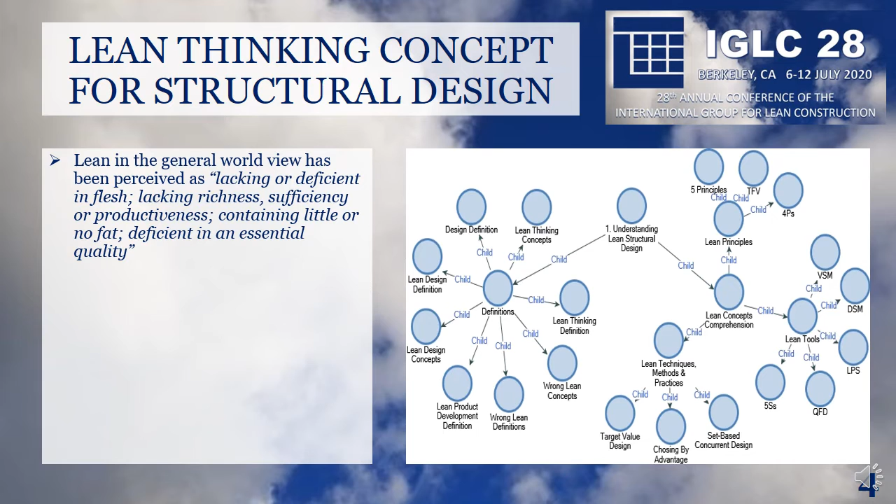Lean production was also defined by Shah and Ward in 2007 as an integrated socio-technical system aimed at reduction of waste through concurrently minimizing supplier, customer and internal variability. Hopp and Spearman in 2004 further addressed lean production as generation of goods or services where buffering costs due to excess lead times, inventories or capacity are minimized. The concept of value generation and waste reduction appear to be the spine connecting these diverse definitions of lean when applied to the manufacturing and construction industries.

The effect of lean concept has motivated many organizations to adopt it. In the attempt of organizations implementing lean concept, Chase in 2001 observed partial adoption of these lean principles without embracing the underlying philosophy and culture initiated by Toyota. Furthermore, the implementation of tools and techniques has been the major focus of most Western companies as compared to the Japanese approach to lean through philosophy and culture.

An overview of research works on lean applied to design demonstrated lean to be a multidimensional concept characterized by different levels and therefore defies a universal definition. However, several researchers have identified lean concepts to be mainly founded on the philosophy and culture with a set of principles, practices, processes, techniques, and tools for customer value creation and waste reduction.

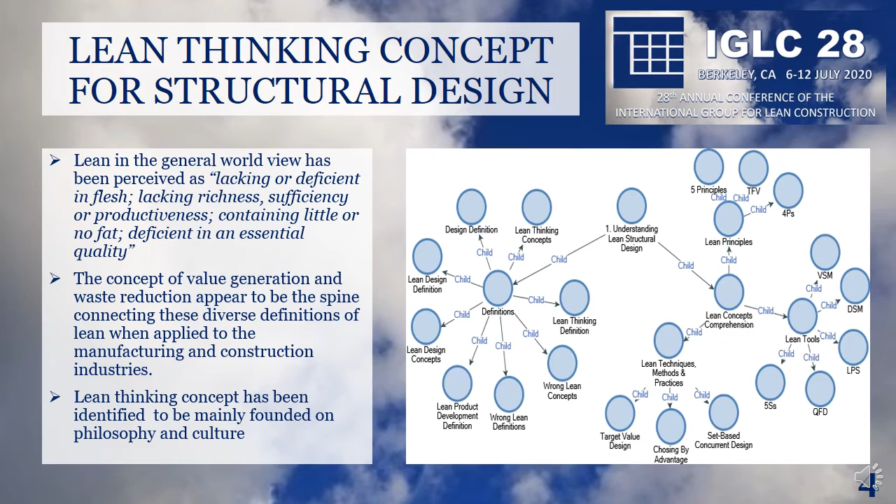Definition of lean structural design. In the construction industry, lean applied to product development achieves the design management field of work, and that's called lean design when applied to building projects. Lean design is an extension of lean thinking in the design phase, which creates the potential for high value in the whole process with well-defined systems, structures, and materials to meet customer needs.

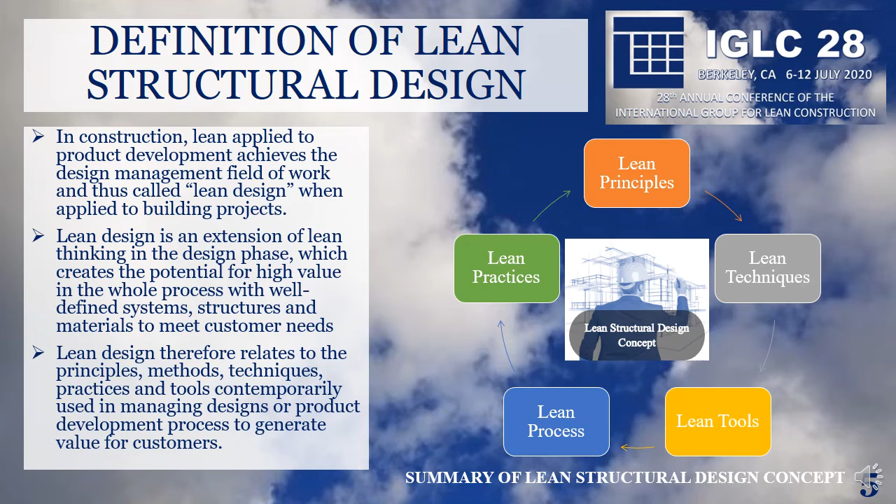Lean design therefore relates to the principles, methods, techniques, practices, and tools contemporarily used in managing designs or product development process to generate value for customers. Subsequently, the application of lean thinking concept in structural design can be achieved through lean principles, techniques, processes, practices, and tools to deliver value for the customer.

Lean principles applicable to lean structural design. Koskela in 1992 postulated a new production philosophy based on the Toyota production system principles and recommended its adoption to construction for identification and elimination of waste activities. Further studies by Womack and Jones in 1996 to implement lean in manufacturing proposed 5 lean thinking principles, which are value, value stream, flow, pull, and perfection principles.

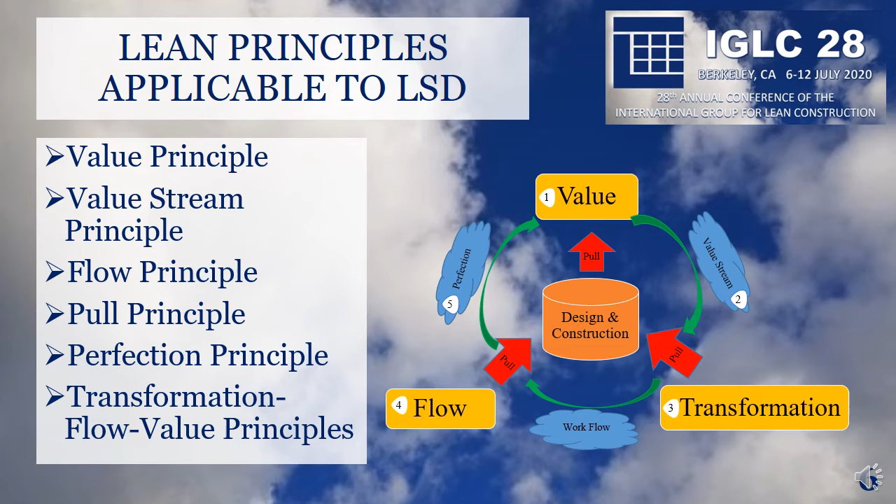Koskela in the year 2000 proposed a theory of production founded on transformation, flow, and value principles, acknowledged as the TFV model, where transformational views of work done are combined with workflow and value delivery. The 5 principles of lean thinking and TFV theory of production have become the fundamental framework for lean application in all phases of construction projects.

Lean techniques and methods applicable to lean structural design. Several techniques and methods exist when it comes to lean application, but the 3 key ones identified from literature are target value design, set-based design, and choosing by advantages. Target value design is a management method for designing and delivering customer value aligned with a defined target.

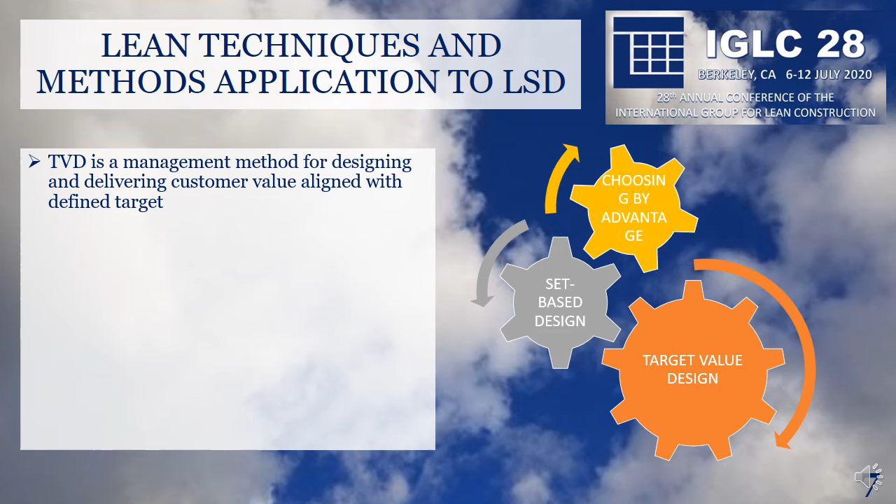Based on the following principles of TVD postulated by Macomber in 2007 and benchmarks by Tommelein and Ballard in 2016, structural engineers can collaboratively work with other team members to implement TVD as follows: detailed engagement with customers to evaluate and validate the business case and establish target value, collaboratively plan the project with customers, design to meet the defined targets, design and detail in sequence of the customer who will use it, that is the pull system, collaboratively implement learning and innovation in design, review and reflect throughout the design process.

Set-based design is characterized by exploration of multiple design options, delays to specifications and commitment, development of extensive prototyping or simulation, and convergence upon the optimum design. SBD can be achieved under these principles: mapping the design space by identification of alternatives to carry forward, integrating and determining solutions from intersections of intervals, and establishing feasibility by maintaining consistency with pre-existing design before committing to a design solution.

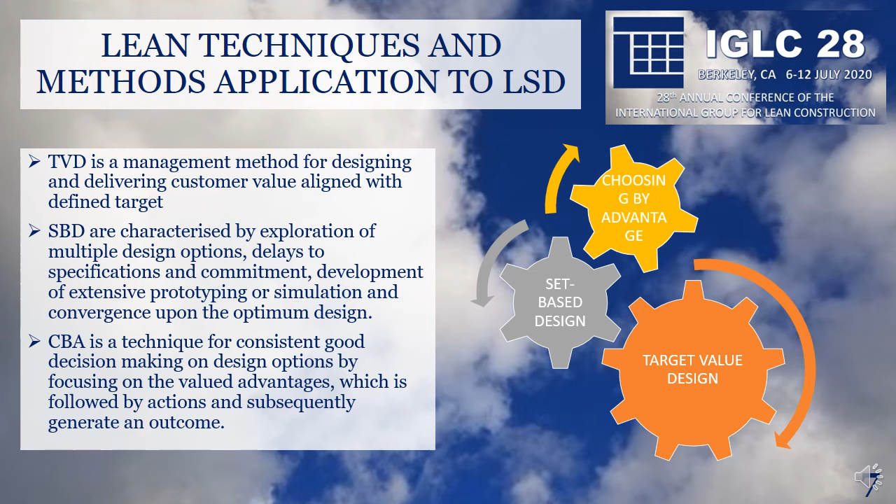A critical overview of SBD reveals its incapacity to provide detailed guidance on how to select options, and so it is jointly applied with CBA, that is the choosing by advantages technique. CBA is a technique for consistent good decision making on design options by focusing on the valued advantages, which is followed by actions and subsequently generates an outcome.

Lean tools for lean structural design. There exist a number of tools that can be applied by structural engineers in their design. This includes value stream mapping, quality function deployment, design structure matrix, last planner system, and the 5 S's. That's sort, straighten or set in order, shine, standardize, and sustain. VSM is a lean tool used to capture the present state of the value stream with regards to information and material flows, identify opportunities to improve flow whilst ensuring waste reduction, and proposing future states showing plans of development.

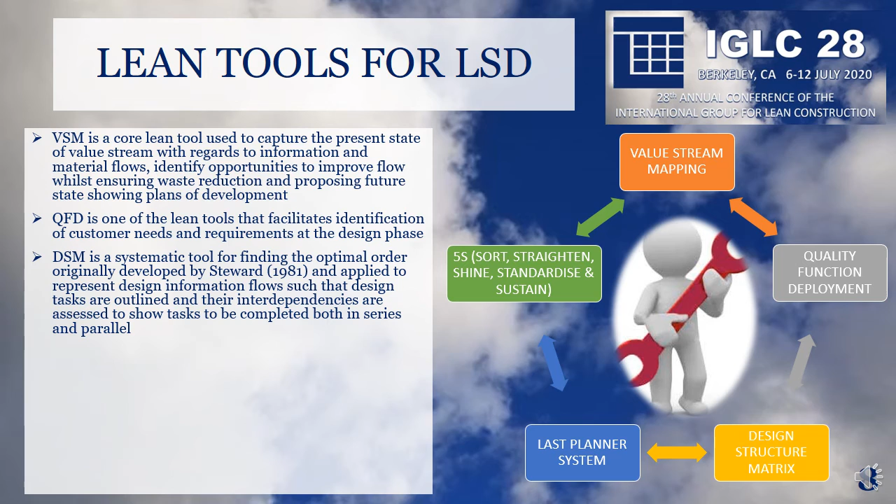The QFD is one of the lean tools that facilitates identification of customer needs and requirements at the design phase. The DSM is a systematic tool for finding the optimal order, originally developed by Steward in 1981 and applied to represent design information flows such that design tasks are outlined and their interdependencies are assessed to show tasks to be completed both in series and in parallel.

The last planner system is also a lean tool originally designed to facilitate stabilization of production workflow, where decisions and commitment to tasks are made by the last responsible person, known as the last planner. The 5S is also a systematic process tool used in organizing a workplace such that it contains only the materials needed and appropriately designated, resulting in work efficiency, reduced waste, optimum value, and productivity.

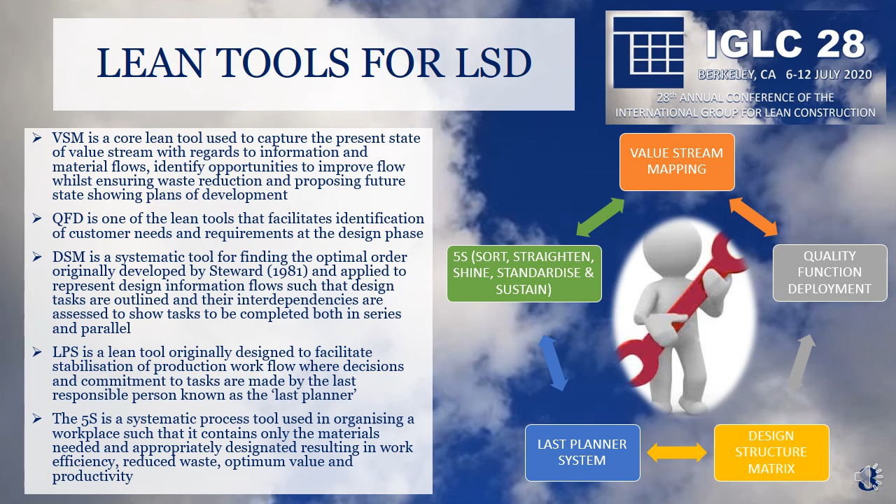Conclusions. This paper focused on the first part of the study where understanding of Lean was gained with respect to structural designs. The research revealed that Lean structural design involved the application of Lean thinking concepts in structural designs through Lean principles, techniques, processes, practices, and tools to deliver value for customers.

This research was mainly based on literature, and the practical applicability of the findings to assess the understanding and implementation of Lean from the structural engineer's point of view forms part of the second phase of the study. Therefore, further research will be carried out focusing on the relationship between structural engineers and Lean using case studies. Further studies will also be done to discuss possible hindrances to Lean structural design and corresponding solutions.